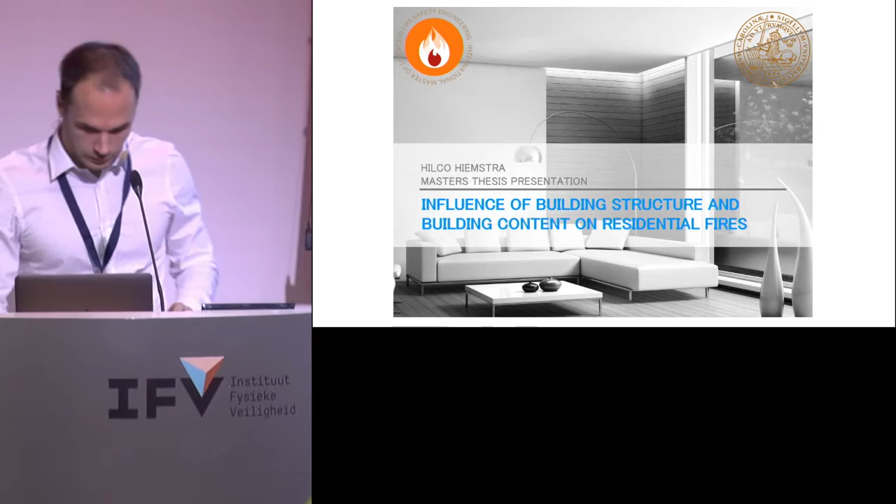Good afternoon, my name is Hilco Hiemstra. I'm from the Netherlands. I did my master at the International Master of Fire Safety Engineering, and I wrote my thesis at Lund University.

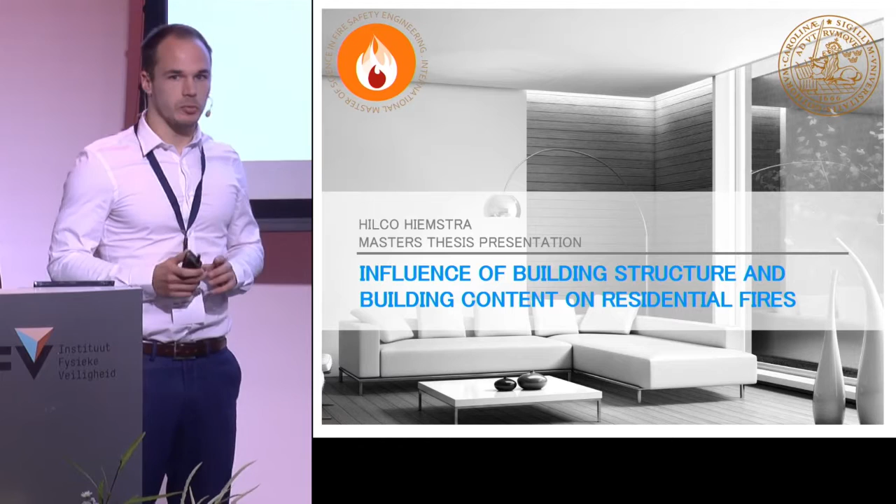There's a lot of research done on fires in residential buildings, and it's important that insulation has an influence on fire behavior and also on the building content. We already know that, but during my thesis I compared how we built in the 70s and how we build today, and also how the building content changed. It's also changed during the last decades, and I made a comparison between these developments and show what the results are. I only have 10 minutes, so I will do it very quickly, and in the end I will give a short conclusion.

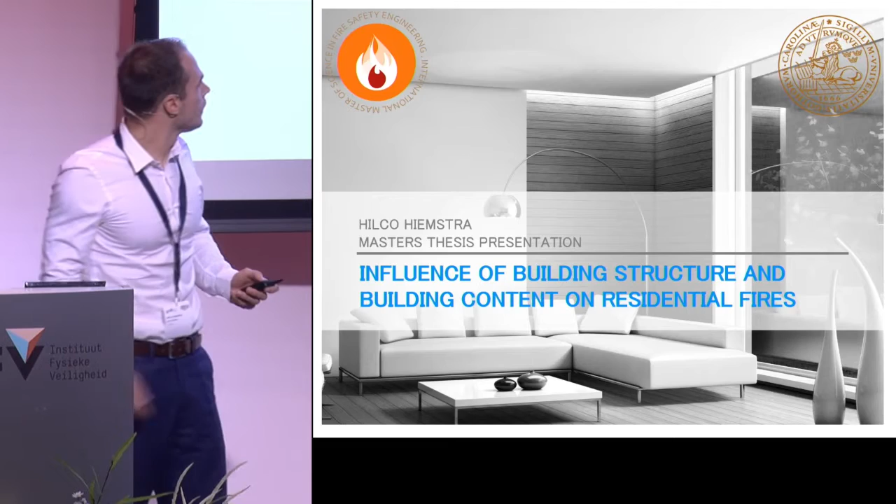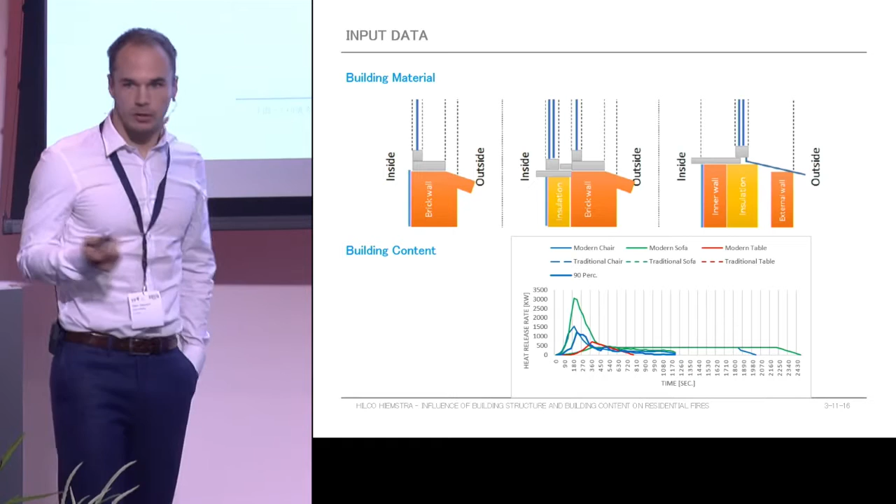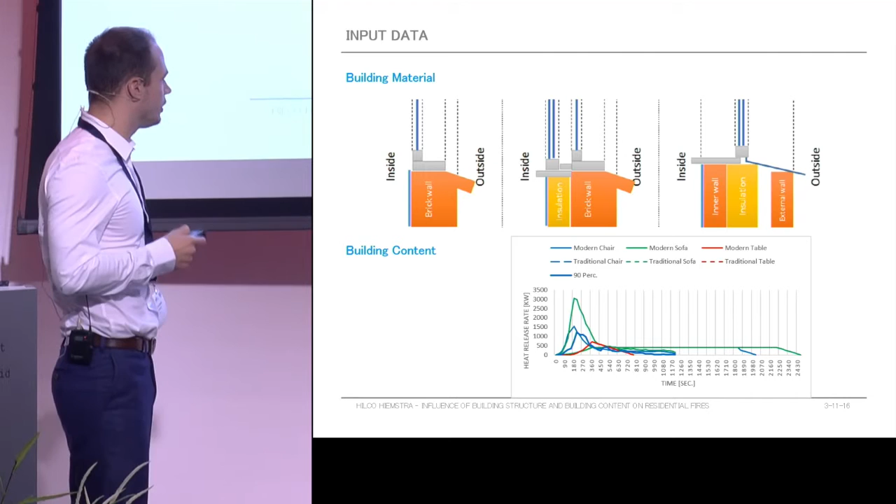In the solid lines I have the modern furniture, and in the other lines the traditional furniture. For example, this solid line is a modern sofa, and this green line here is a traditional sofa. So you can already see there is a lot of difference in this data, and nowadays we also use data from tests done in the 70s and 80s. So it's very important to see the difference between these items.

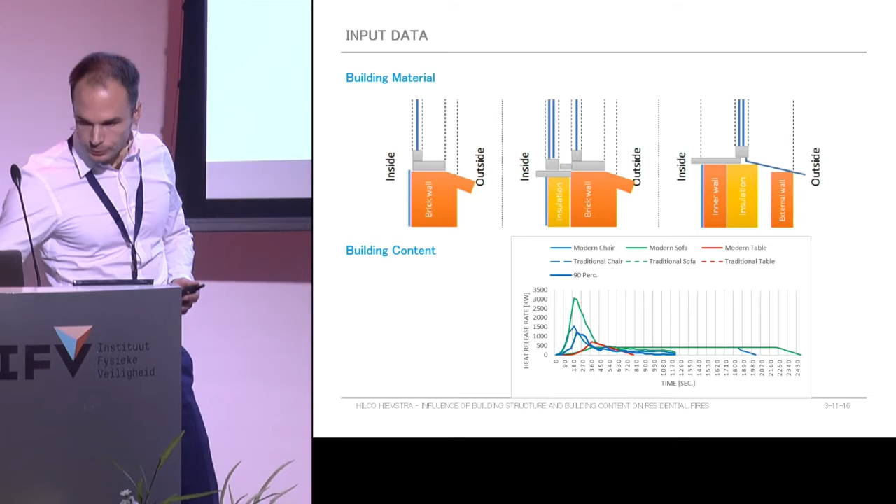I use this information in a two-zone model. I used B-risk for this research because B-risk is a two-zone model, so it's very easy and you can compare very quickly different scenarios.

B-risk can simulate item-to-item fire spread ignition. So what I did is I set up a fixed geometry and a fixed placement of furniture. This is my standard input.

First I start with a fire in a sofa. B-risk can simulate fire spread to, for example, a table or another sofa, so you can generate a more realistic fire curve.

B-risk can also simulate irradiation from a hot layer. If there is a hot layer, you have radiation from the smoke layer that can also ignite items in the room, and you can make a lot of variations of different fire scenarios. I think B-risk was a very good program to use for this research.

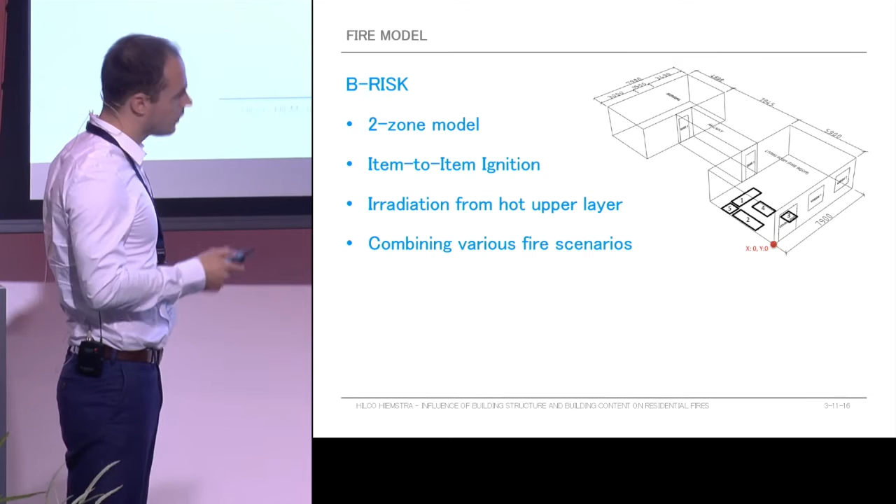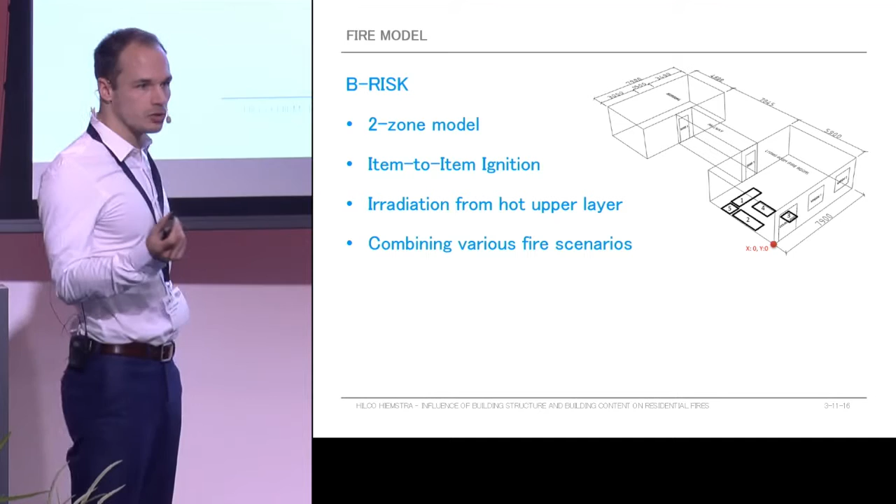So I have 12 different scenarios, 12 different runs to compare. First with traditional furniture, then with modern furniture, and then with windows opened and closed, to see the influence of closing the windows or not. So I made these comparisons.

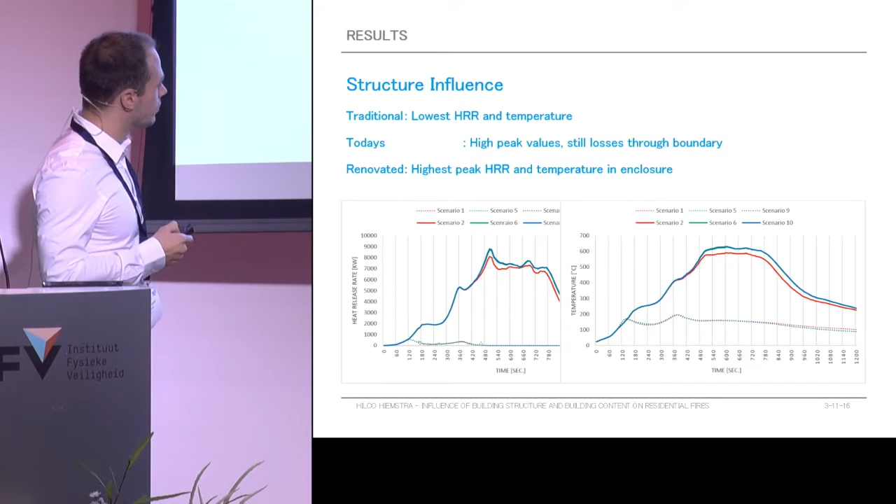These are the graphs I gained. This is the traditional case, with a dotted line showing when the windows are closed. For the traditional case, I mainly used the open-window results, because in the under-ventilated situation you get almost the same results, as the fire goes out very quickly.

From these graphs you can see that the traditional structure has lower heat release rates and lower temperatures. The red line is the traditional case. This is a comparison of the structure with only modern furniture — the traditional structure has a lower heat release rate and also lower temperatures.

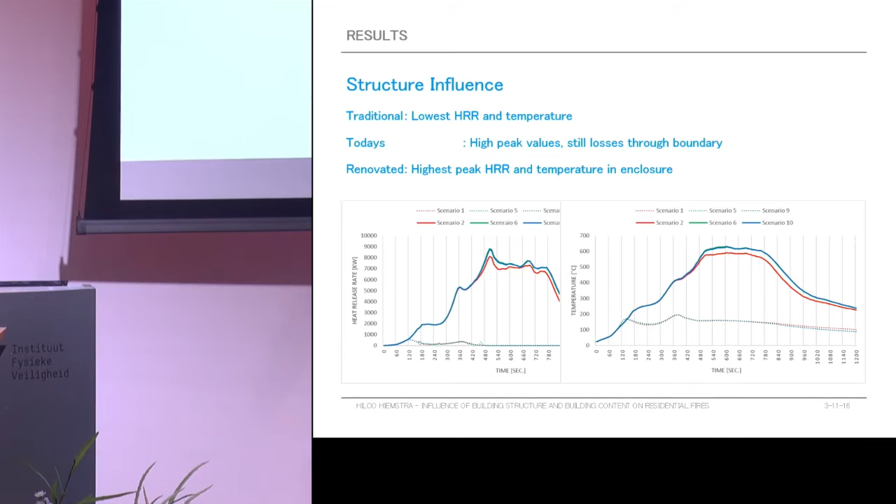Lower temperatures in the enclosure. The renovated case is the green line, which gives the highest peak values. This is because the insulation is placed on the inside, so heat does not loss quickly — it stays in the room, which is why the temperatures are higher.

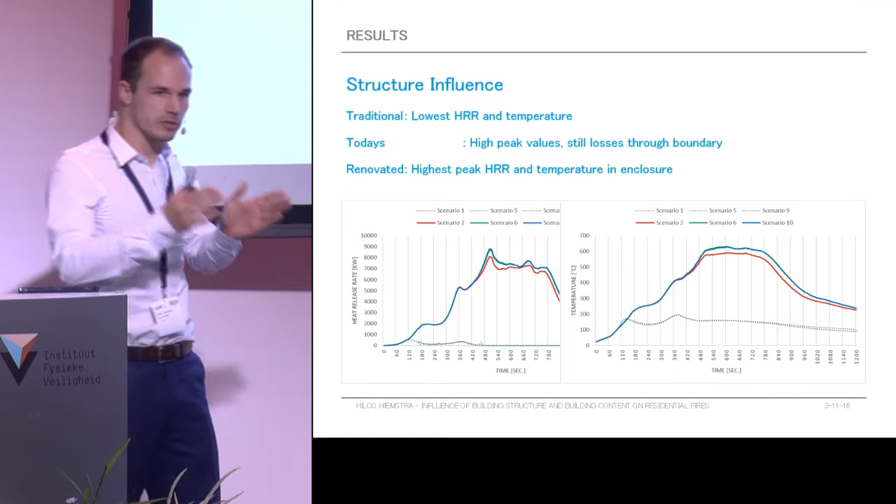Today's structure is in between, because the insulation layer is placed on the outside. There is first a concrete layer, and the concrete can absorb a bit of heat, which is why the temperature is a bit lower than in the renovated case.

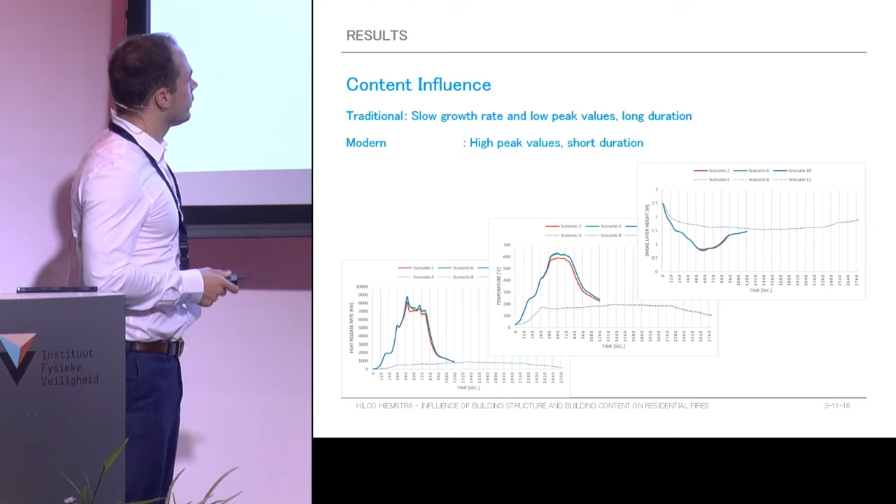Then the influence of the building content, the furniture. This graph shows heat release rate, temperature, and smoke layer. The solid line is the modern furniture — you can see the modern furniture has a really intense fire, very short duration but very high peak values, and the same goes for the temperature.

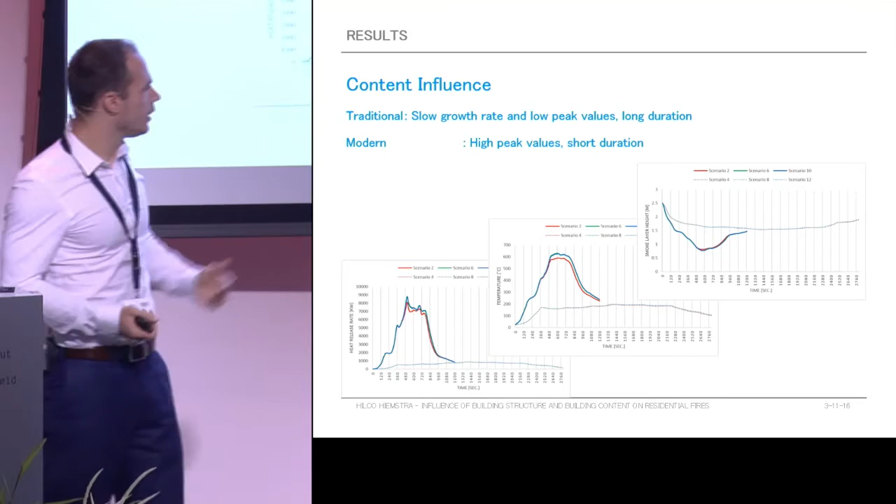The traditional furniture gives a small fire, but the duration is much longer, and this also counts for the temperature. For the smoke layer, it stays equal because heat can go out steadily through the windows, but with an intense fire there's too much mass loss rate that can escape the window, so you get a thicker smoke layer.

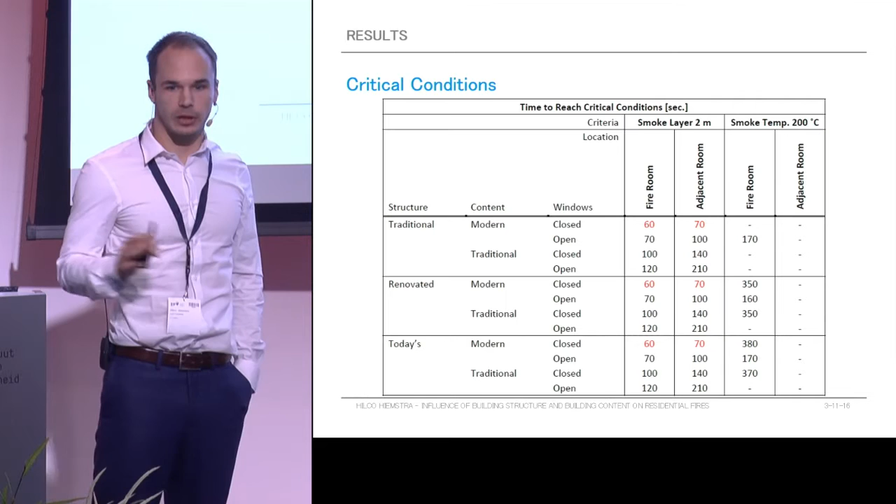The building content is very important for life safety. In all cases, modern furniture gives critical conditions very quickly. The traditional structure becomes more important when the fire is fairly developed, but by that time people already are, or have to be, out of the building.

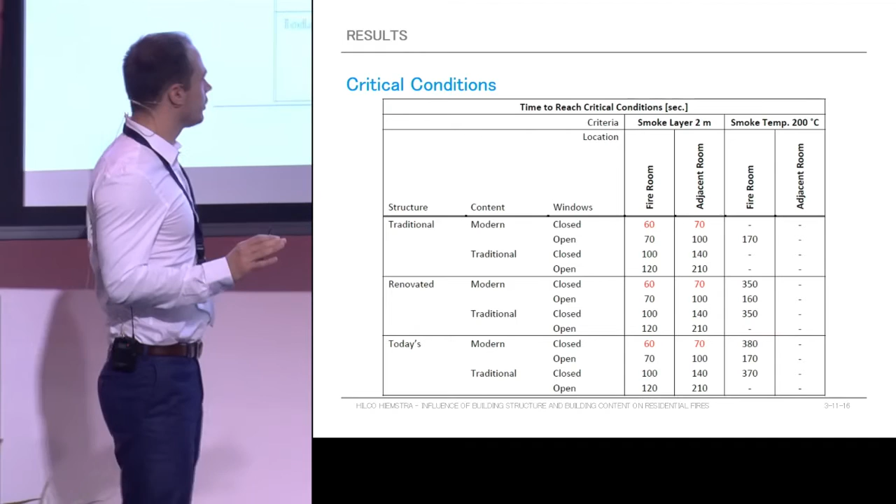Also, when the windows are closed and the fire is under-ventilated, critical conditions are reached even earlier, because smoke cannot go out — you reach critical conditions already within 60 seconds. You can also see that it's not the temperature that is the main part of the critical condition, but the smoke layer going down very quickly, so you have to walk through toxic gas, and that's dangerous.

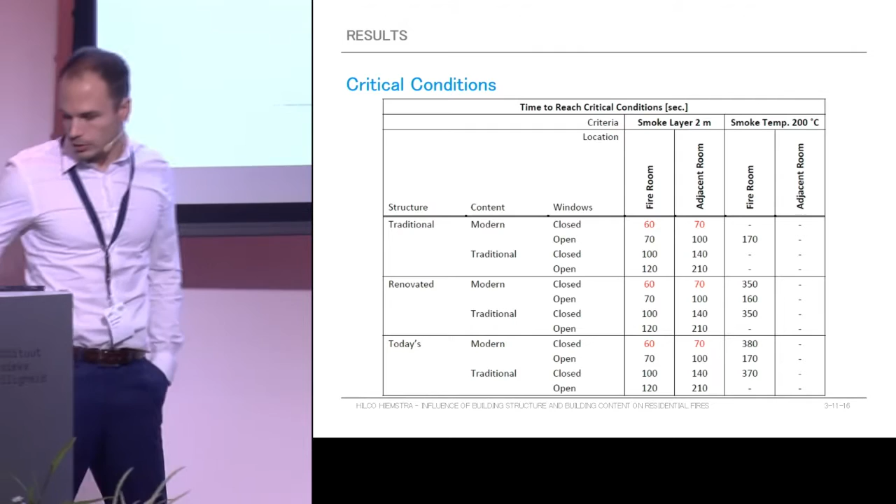In conclusion: with more insulation, higher peak values of heat release rate and temperatures are reached. Insulation placement matters — on the inside, temperatures will be higher than on the outside. When windows are closed, critical conditions are reached earlier, and structure type does not affect the time of critical conditions much, because people are already out of the building.

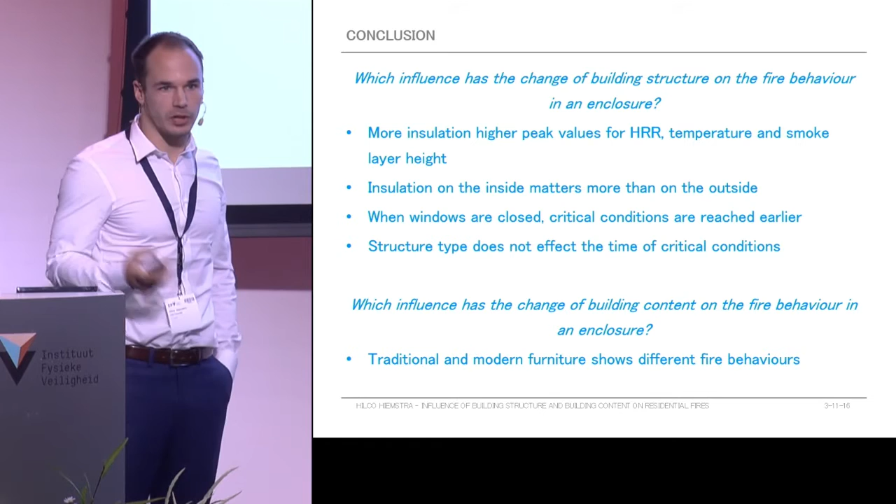Which influence does the change of building content have on fire behavior in the enclosure? Traditional and modern furniture show different results — modern furniture has very intense fires of very short duration.

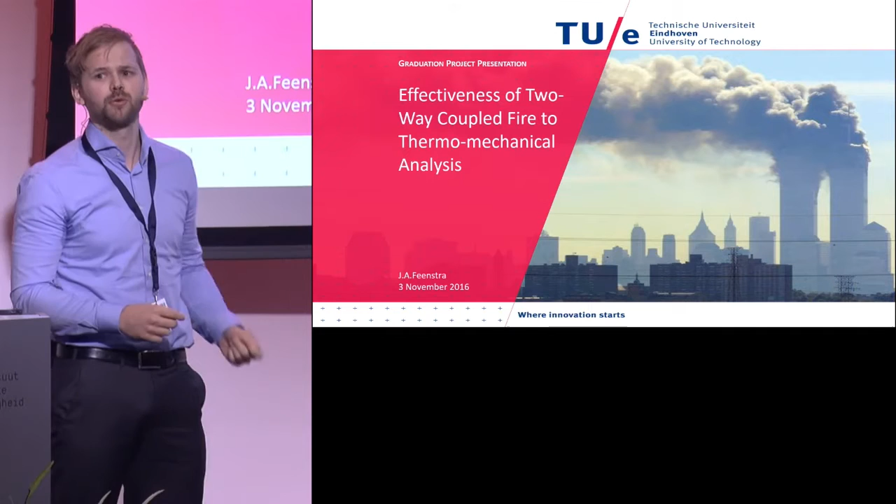Welcome all, my name is Jelmer Feenstra. I recently graduated from Eindhoven University of Technology as a structural engineer, and it's an honor to present my thesis project here. I studied the feasibility and effectiveness of two-way coupled fire to thermomechanical analysis. This picture shows the attacks of the World Trade Center, a moment soon after the crash of the second plane. I do not show you this to shock you, but this event triggered a renewed interest in structural response to fire.

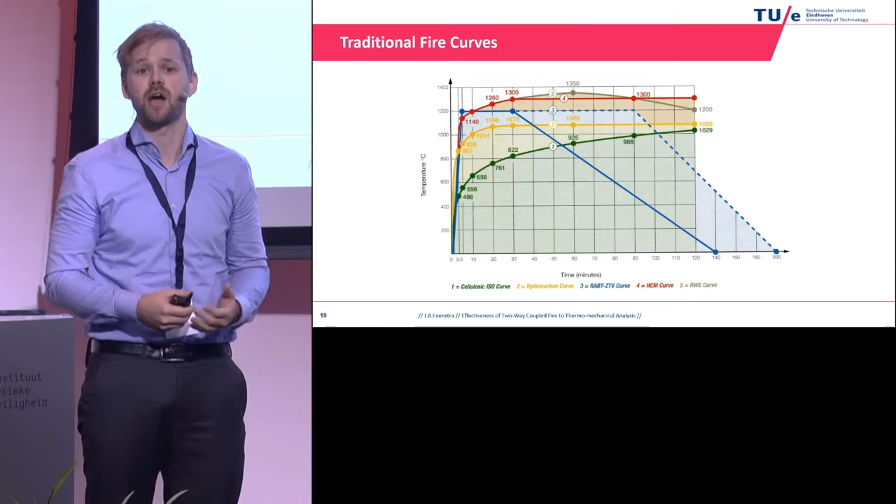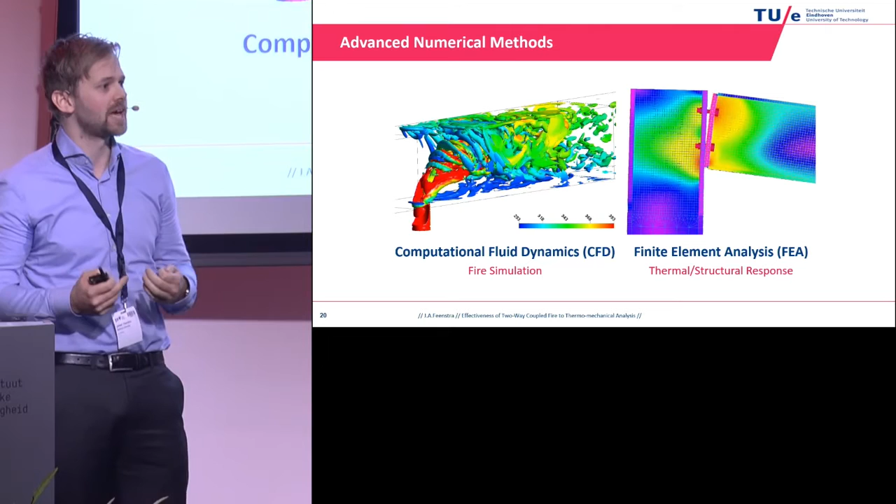The typical way we deal with structural fire calculations is by imposing so-called time-temperature curves onto our structure and then analyzing its behavior. The main drawback is that it can't accurately resemble the randomness associated with fire, and to a degree not the 3D dependency of the fire on the compartment and the structural system itself. So in the aftermath of the attacks on the Twin Towers, there was a request to make use of more advanced numerical methods for these types of calculations, specifically computational fluid dynamics for fire simulations, combined with finite element analysis for heat transfer and structural response.

There are various examples in literature where people combined these systems, referred to as coupled CFD-FEM or coupled fire to thermomechanical analysis. Basically, you start with the fire simulation, from there you obtain your thermal data. You then transfer to the finite element domain, where you analyze how that simulated fire influences the temperature of your structural system, here represented by a steel plate. These temperatures induce thermal expansion, displacement, and mechanical response, which you analyze in the next step, the structural response analysis.

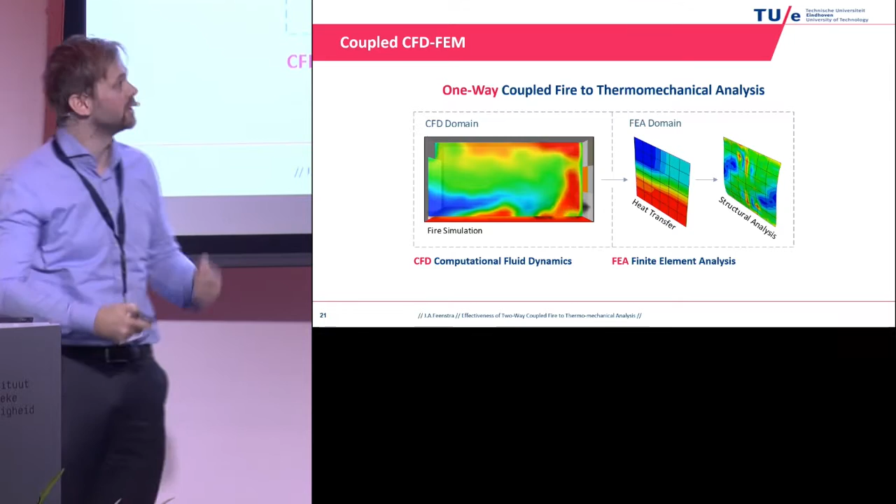You can find various examples of this in literature, but what I'm interested in is that when the fire starts blazing and the system starts changing and possibly even fails, your compartment where you started actually changes. So the structural response could in turn influence your fire. I'm not only interested in the effect of the fire on the structural response, but also of the structural response back on the fire. So I set out to study this subject, and the first question I asked myself: can we actually do this? Can we combine these systems both ways?

If I get an idea of this, I want to study how to do this, and how to do it efficiently without it taking too much time. And in the end, because it's a circular process now instead of a linear process, I would like to comment on its effectiveness. Should we even do these kinds of simulations?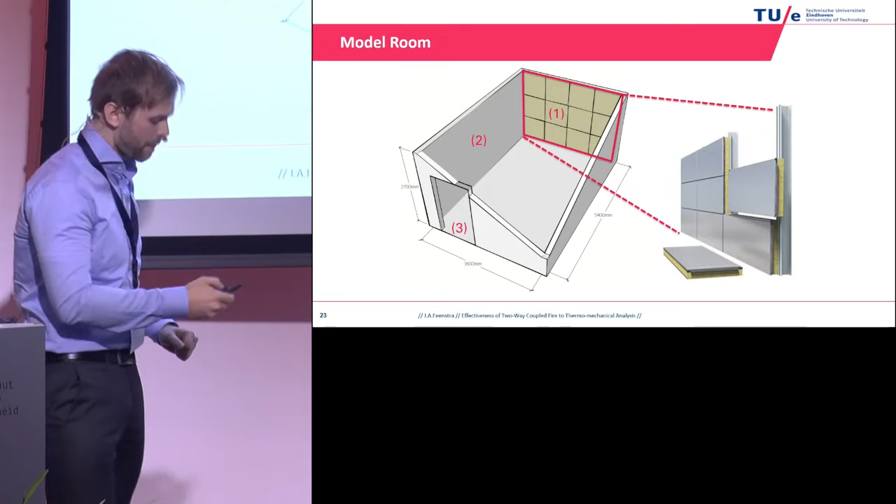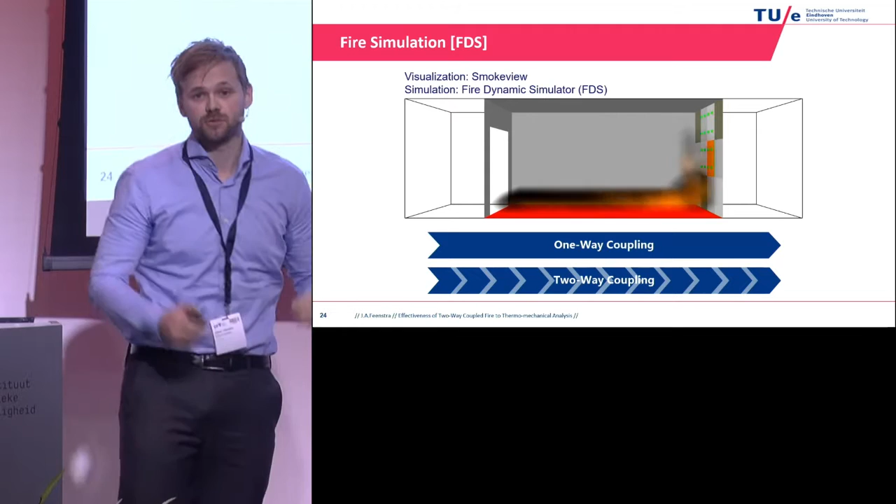Possibly far better to just illustrate a quick simulation of a fire. Here you see an FDS simulation of a room fire. Actually, it's about an hour of simulation, starting from flashover, fully developed, and a decay phase.

My main point here is I want to stress the difference between this one- and two-way coupling. When I do a one-way coupling, I can start with just the fire simulation for the full duration, and then do the heat transfer analysis and the structural response analysis. But when I want to do it in a two-way coupling, I have to know during my fire simulation if something in that system changed, so I can only do it for a couple of seconds - ideally per single calculation step.

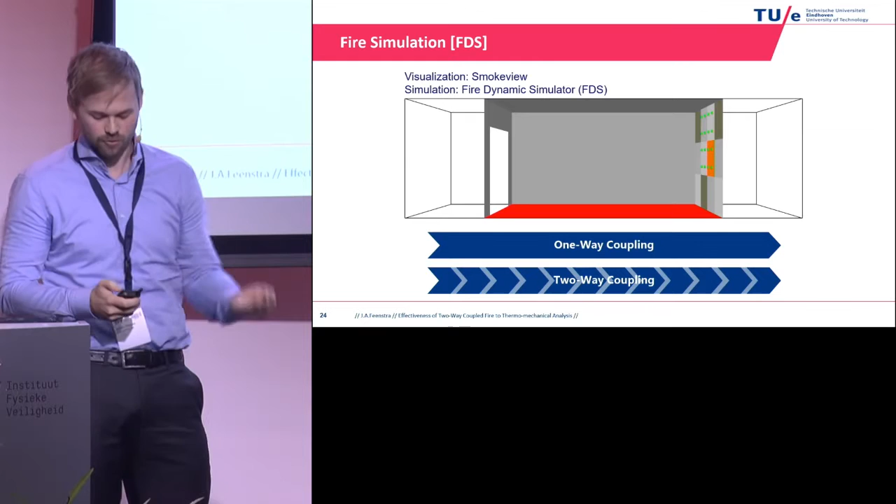So I have to do this, as represented by these banner-like arrows, in very small steps: a couple of seconds of fire simulation, heat transfer analysis, structural response, couple the response back, and so on and so forth. Now, when we redraw my scheme with the pictures I showed before, here represented by the types of analysis with the blue squares, we obtain something like this. These are the various steps I identified as what you have to do to come up with this coupling. So how can we actually do this?

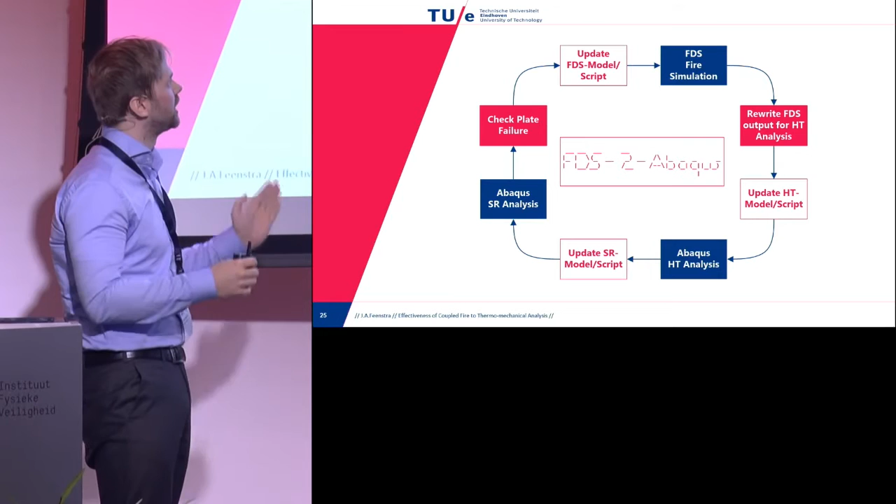Now, you can imagine that when you want to do this one-way coupling, you can do this by hand. It takes a little time, but it's doable. But when you have to do this circle over and over again, it will quickly become a very tedious and time-consuming task.

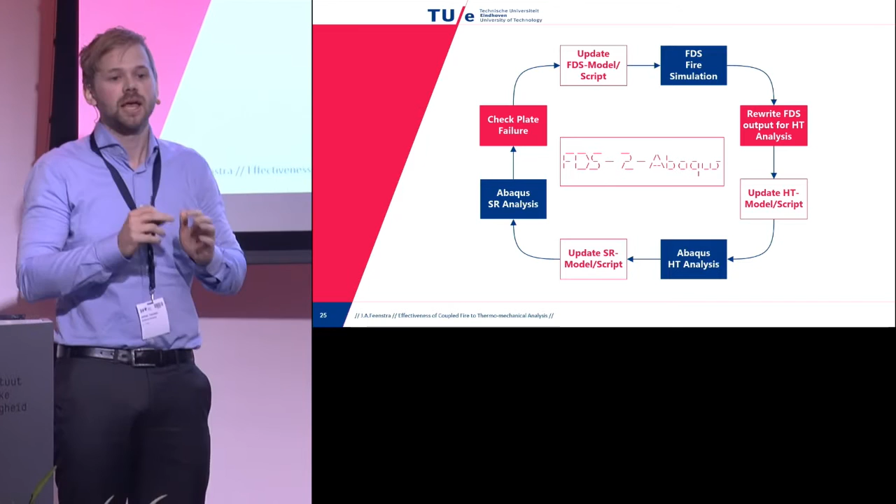So therefore I learned how to code and wrote a program which could do these separate steps for me. This program I refer to as FDS to Abaqus. Sadly, due to time considerations, I can't go into detail on the separate steps, but what you should take from this is that this program, FDS to Abaqus, is able to manage both the one- and two-way coupling of such a system, in this case my system.

Now, I do want to stress one important thing: I don't think this accurately resembles a real-life fire simulation, due to a lot of assumptions that had to be made throughout the process. But it does illustrate that taking this effect into account could significantly influence both the fire behavior and the further failure progression of your structural system.

So with that, I would like to summarize my presentation. I set out to couple a fire simulation to a structural response analysis, but also couple my structural response analysis back to my fire simulation. By doing this, I found that when we take the one-way coupled approach versus the two-way coupled approach, there is a significant difference in failure of my structural system.

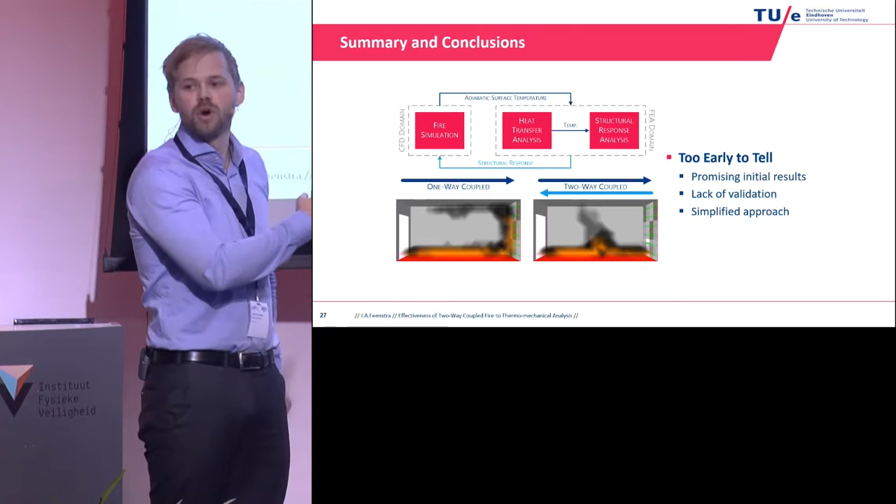Now, when I go back to the question I asked - should we even do these kinds of simulations - I sadly have to say it's too early to tell, mainly because most of this research has been based on the computer, so there's no validation whatsoever. That would be one of the next steps. Also, I took a simplified approach to both my structural system and my fire.

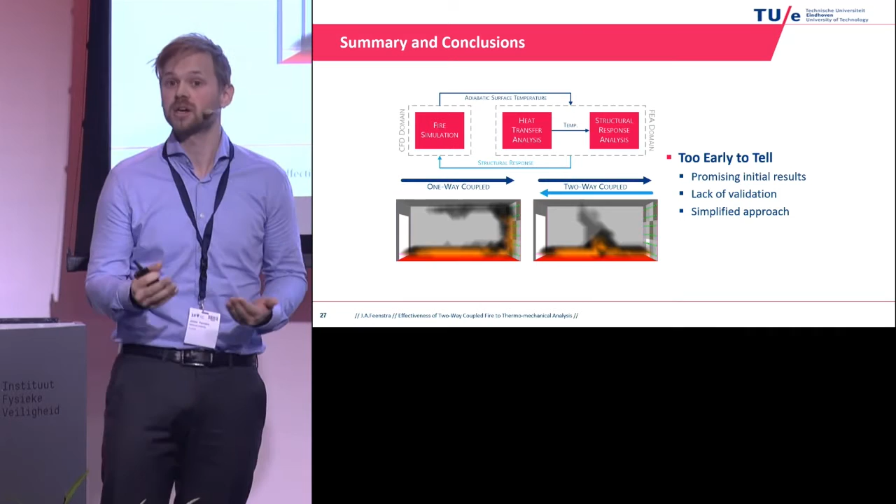But still, there are some promising initial results that show that with further development of this tool, it can become a very powerful tool in structural fire analysis, and maybe even in fire safety engineering. And with that, I would like to thank you for your attention, and you can find me if you have any questions later on. Thank you.

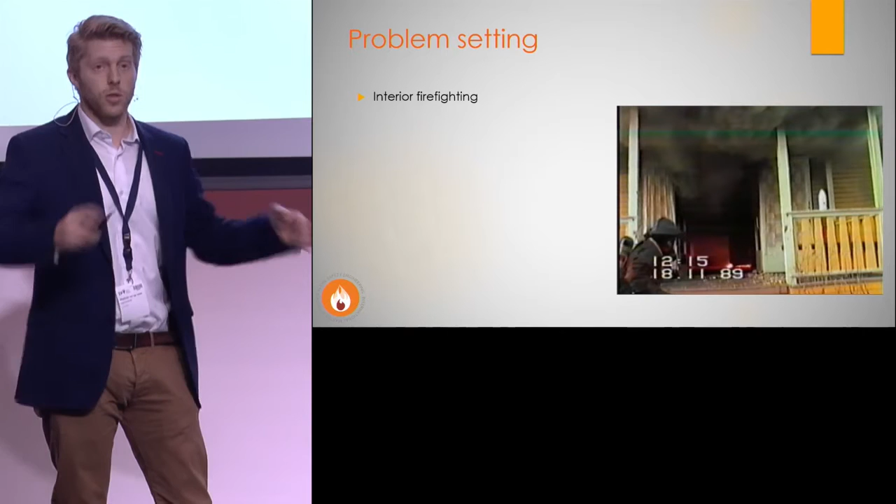For all the people who aren't firefighters, let's start with the problem setting. Very often we have to perform interior firefighting. A fire in an enclosure is going to produce smoke, and this smoke builds up in a gas layer. This gas layer is hot, creates very low visibility, and also contains unburned flammable gases. This means we constantly have to work in near-flashover conditions, which can be a very stressful environment.

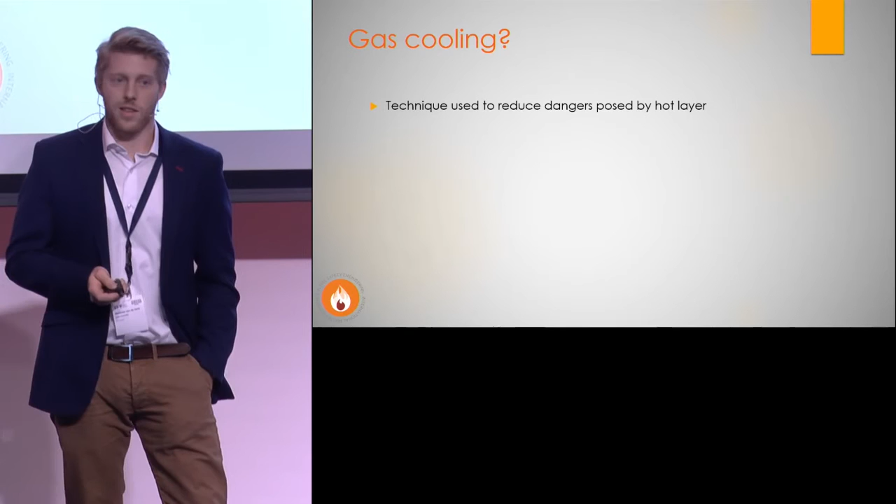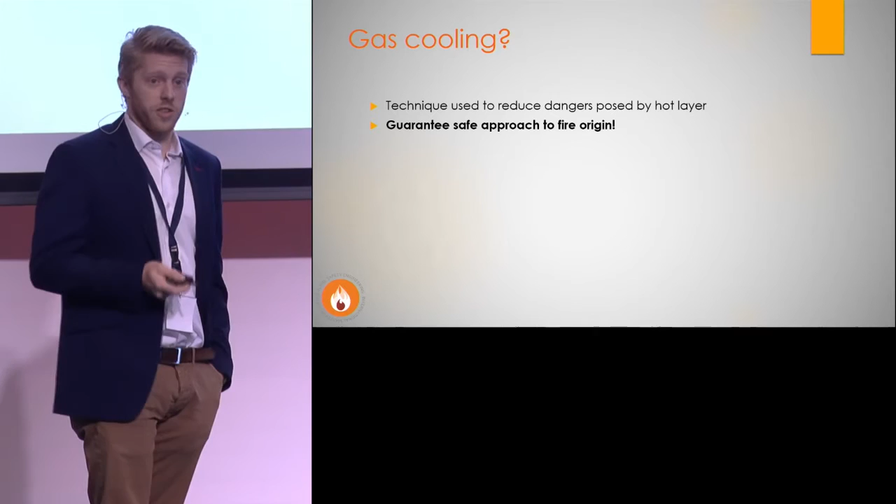Now, gas cooling - what is gas cooling exactly? It's a technique used to reduce the risks posed by the hot gas layer. It's important to notice that it isn't a technique to handle the fire itself, but is used to approach the fire safely. How do we do that? By focusing our attack on the hot gas layer. If we perform this well, we could theoretically cool the gas layer, contract it, and maybe inert it. However, if we perform it badly, we can create a lot of excessive steam.

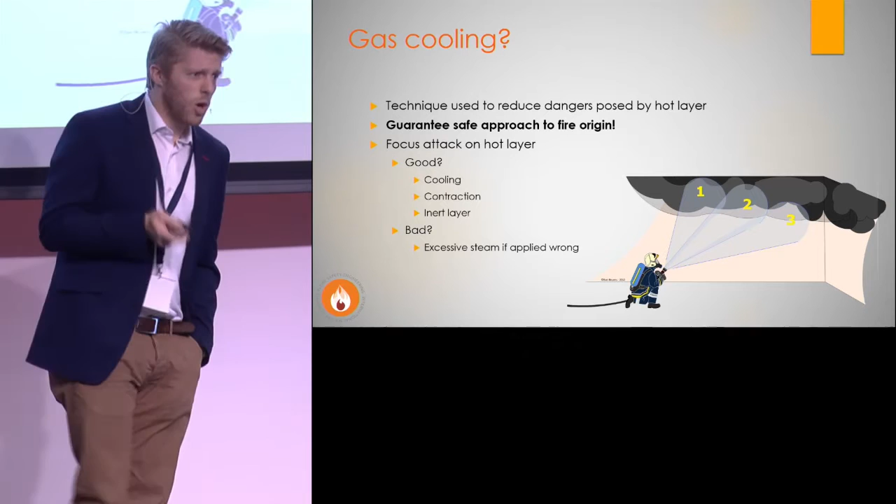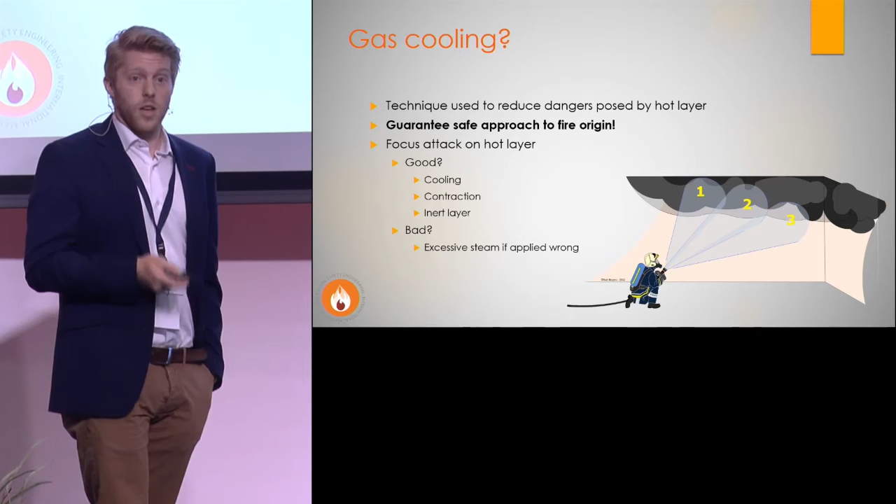Now, what is the reason why I've done this particular topic? Even though this technique is already implemented in several fire stations, there's still limited scientific validation on it. So the technique that is known right now is the pulsing technique.

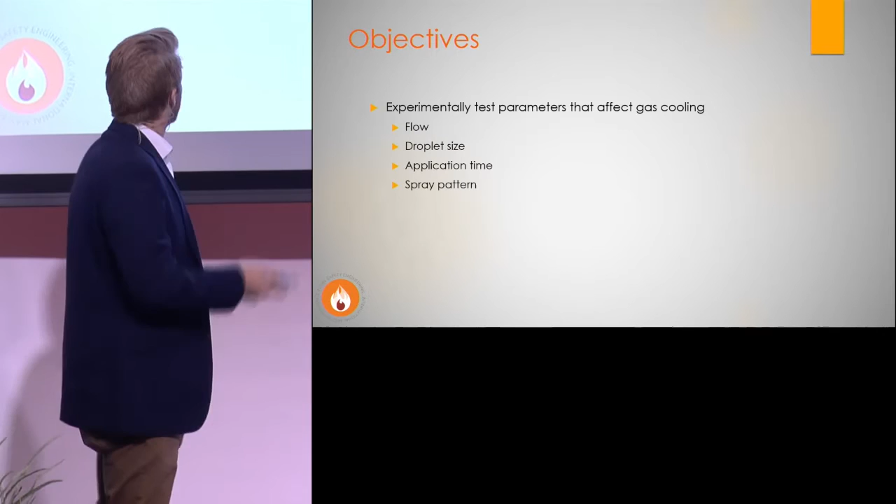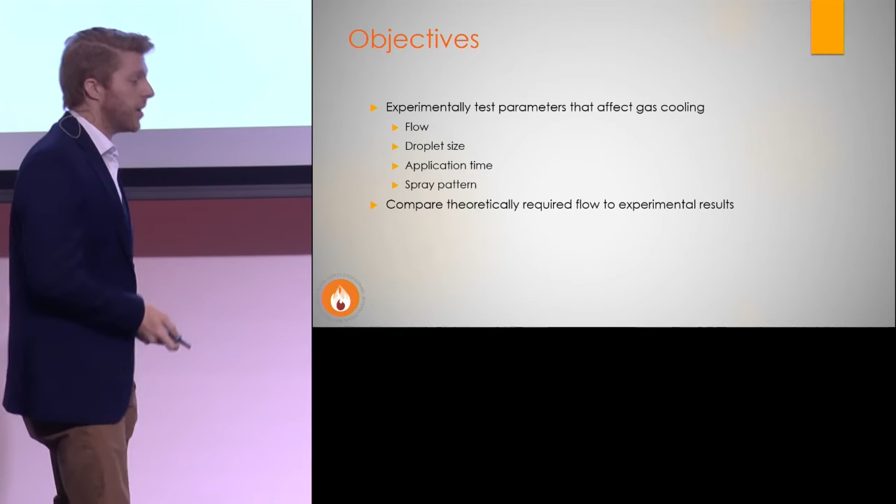So what were my objectives? First, I wanted to experimentally test the different parameters that affect gas cooling. I also tried to isolate the phenomenon of gas cooling and look at those different parameters alone. Secondly, I also looked at the theoretical validation compared to the experimental data. Lastly, I studied the secondary effects, namely the gas layer contraction, but also the buffer time before it reheats again after we apply the water.

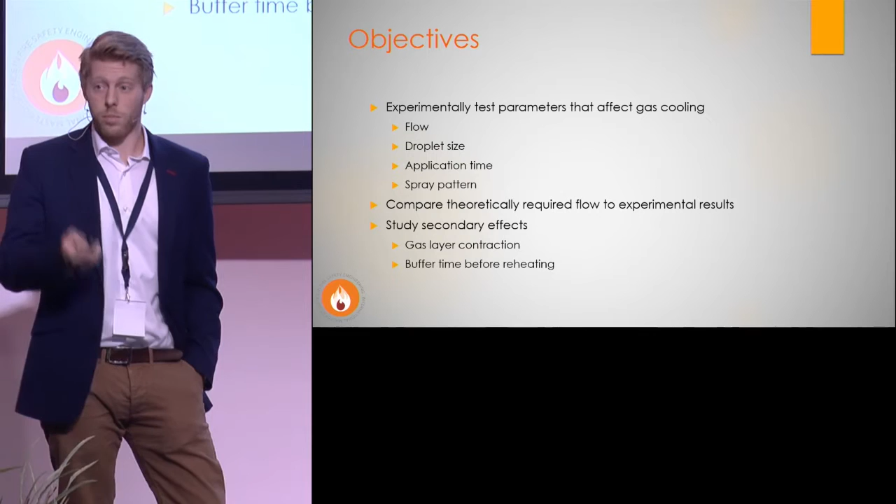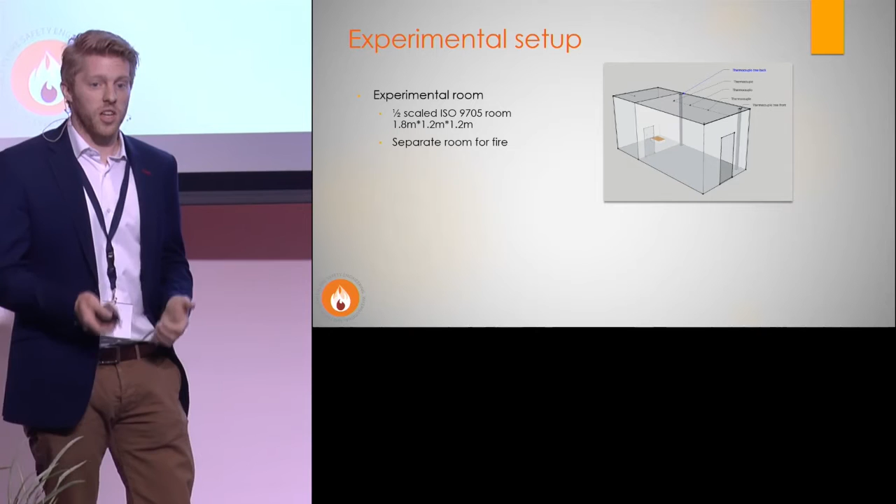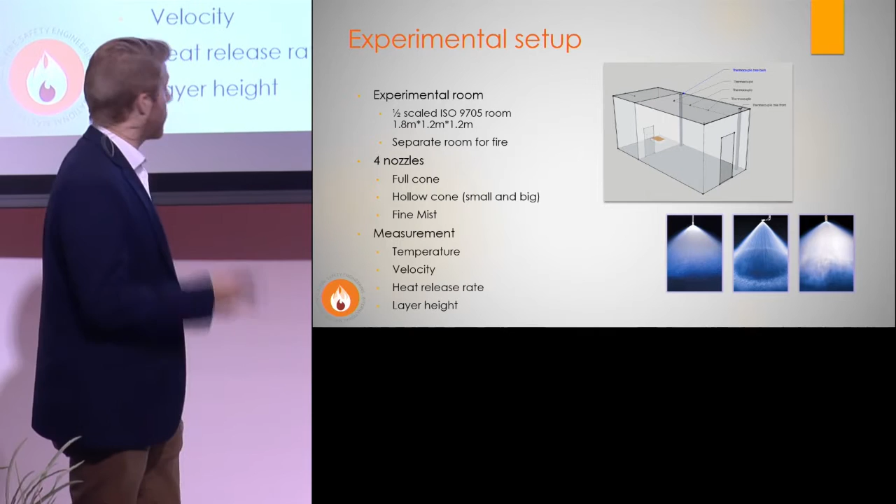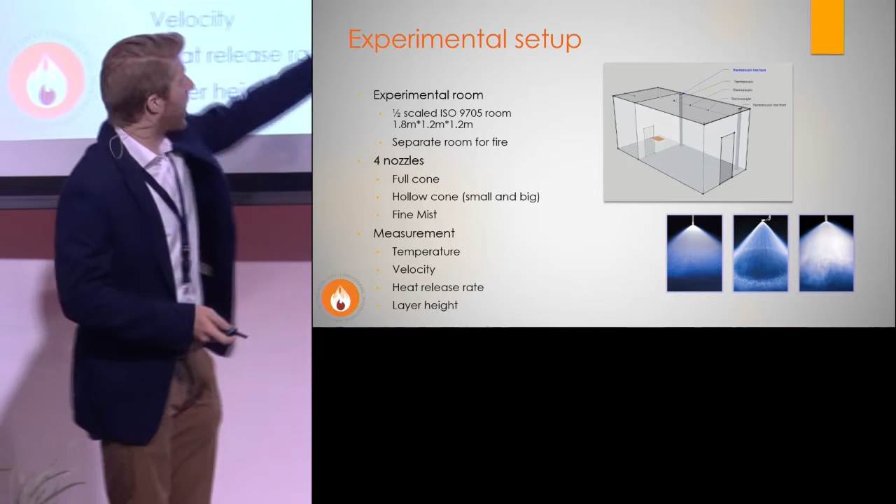The procedure: the aim was to create a gas layer of 160 degrees Celsius. We used a pre-burn of 90 seconds so we always had the same temperature, and then we applied the water. The aim was to decrease the gas layer temperature to 100 degrees Celsius. After that, we continued with a post-burn of 5 seconds to see what happens after we have applied the water.

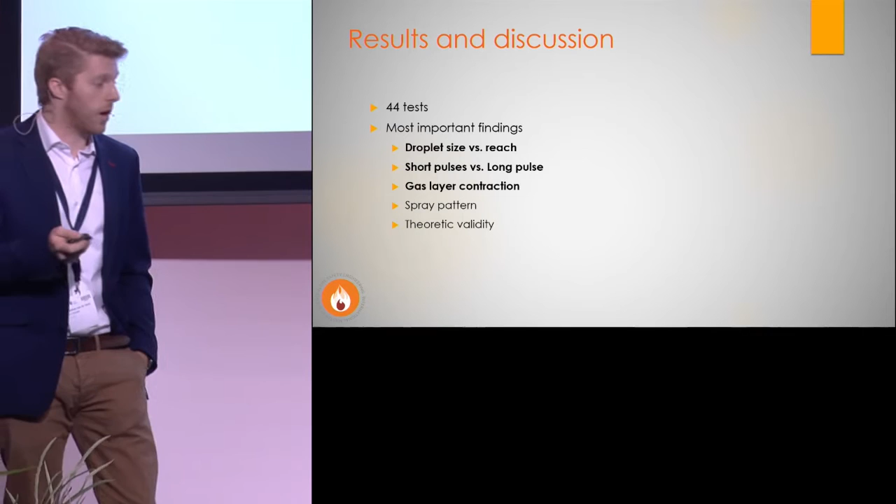In total, there were 44 tests performed. The most important findings were droplet size versus reach, short pulses versus long pulses, gas layer contraction, different spray patterns, and the theoretical validity. Since I only have a limited amount of time, I will only discuss the first three.

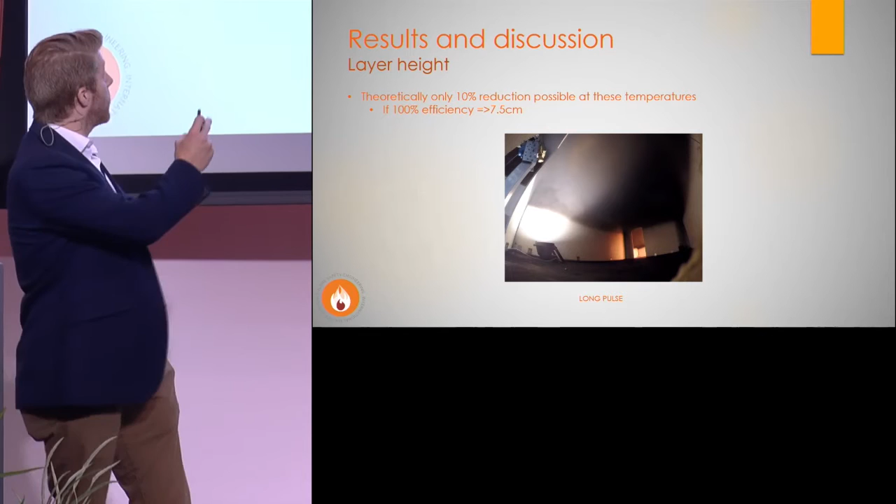I will start with the layer height. Why do I start with this? First, to show you exactly on video how the experiments were conducted. For the layer contraction, we did some theoretical calculations and saw that at these temperatures there was only a reduction possible of about 10%. So we had a gas layer of 80 centimeters, meaning you could only change it by about 8 centimeters if you have 100% efficiency.

So you can see the nozzle here.

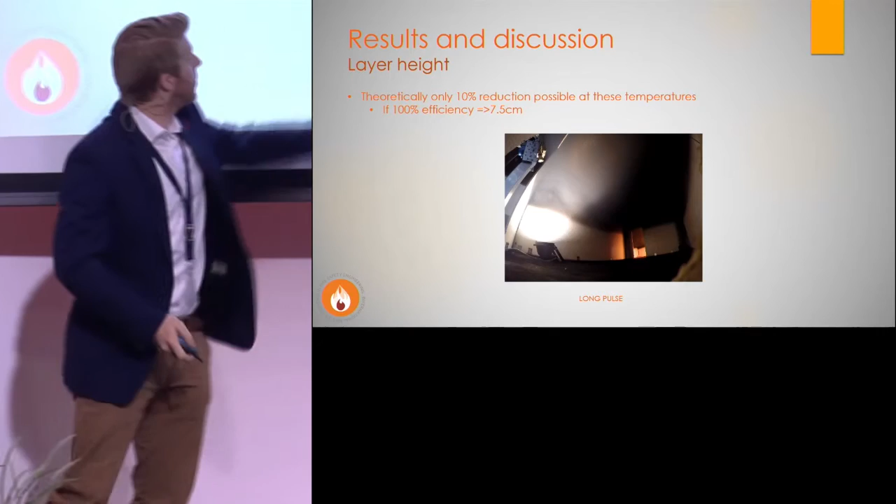As you can see, or might not see, there wasn't a very big difference in the gas layer contraction.

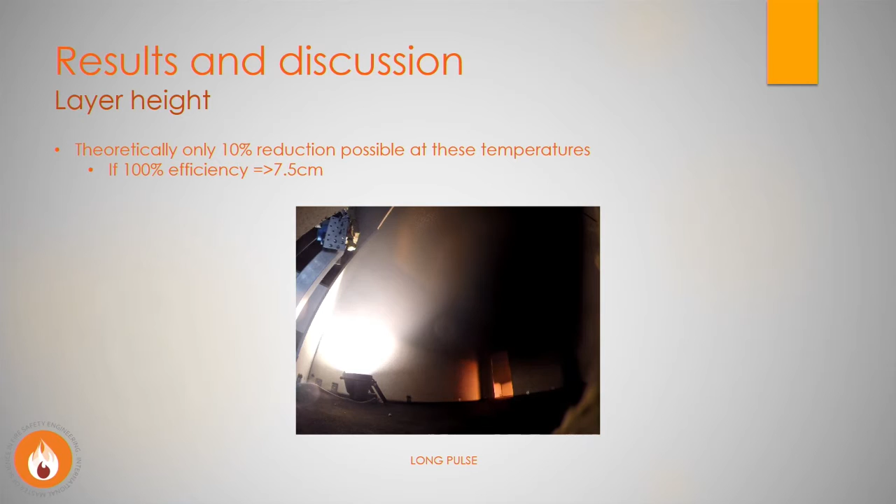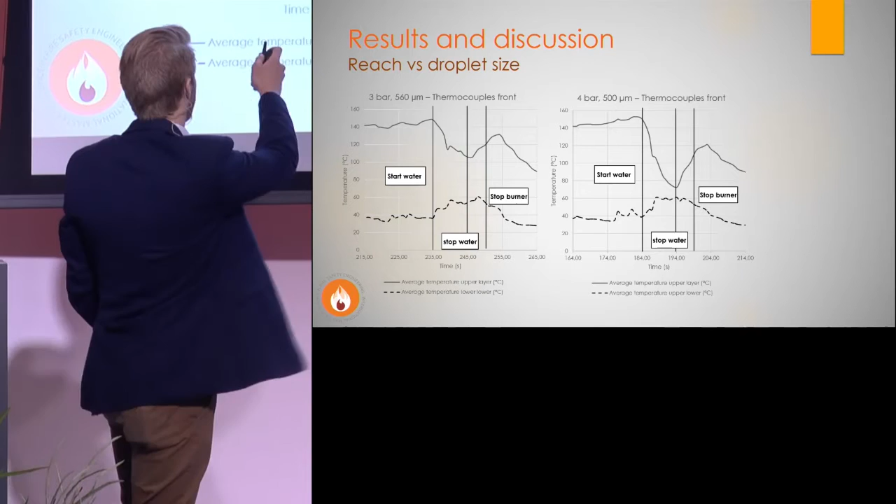Now, more interestingly, there were some very nice remarks on the reach versus the droplet size. Before I explain what I'm trying to say with this, there are two charts here which show the temperature versus time. Both of these charts are tests that were used with the same nozzle. But what is the difference?

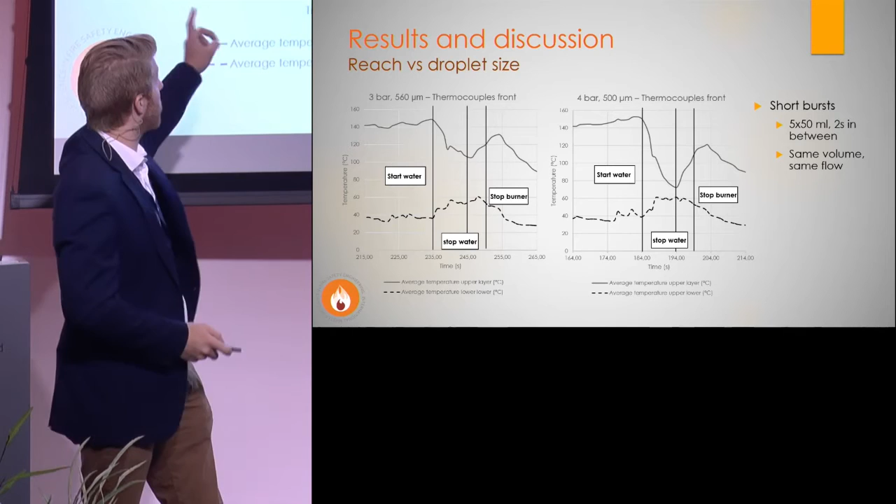We used, on both tests, 5 fast shots of 50 milliliters with 2 seconds in between. This was done to use the same volume and the same flow. Now the big difference here is the pressure. As you can see, we have a pressure of 3 bar and a pressure of 4 bar.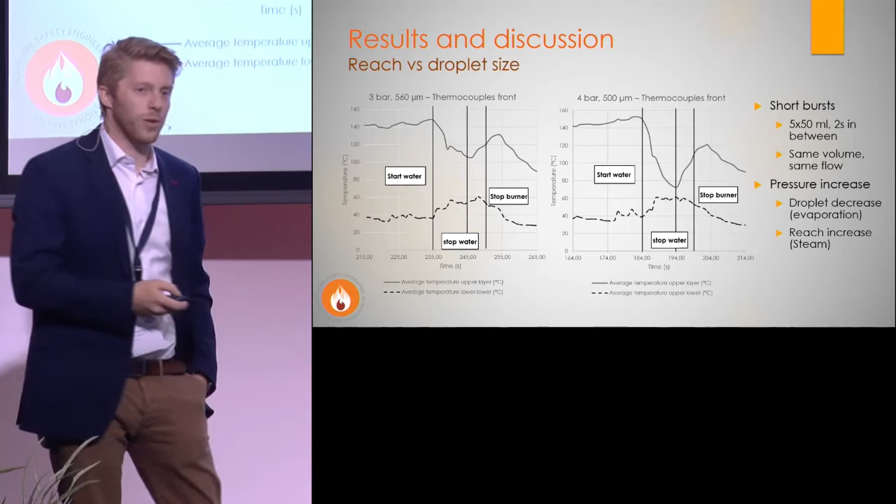As we know, when the pressure increases, the droplet size will decrease, so the evaporation will be faster. Also, if we increase the pressure, the velocity will increase, so the reach of the stream will increase. So more water will hit the ceiling or the walls, and this can result in a lot of excessive steam.

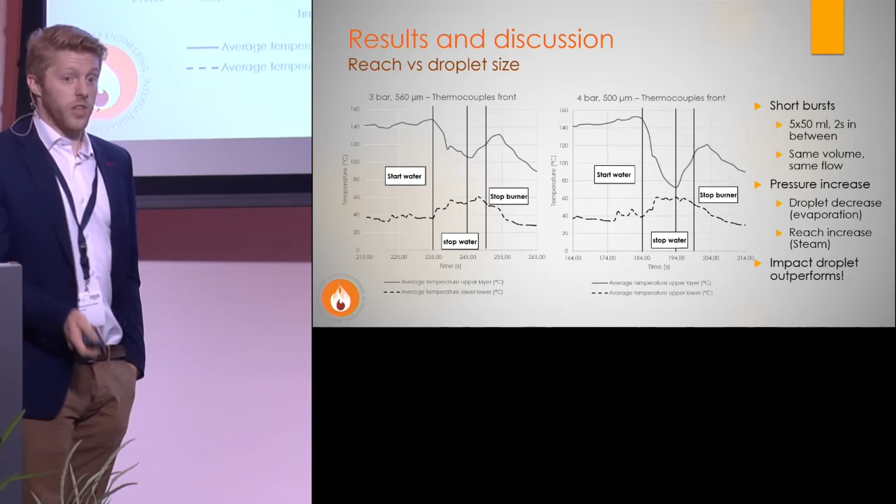Now you can clearly see that at 4 bars, the highest pressure, this first effect, the droplet decrease, outperforms the inverse effect of the increased steam. So there was a way better cooling at 4 bar.

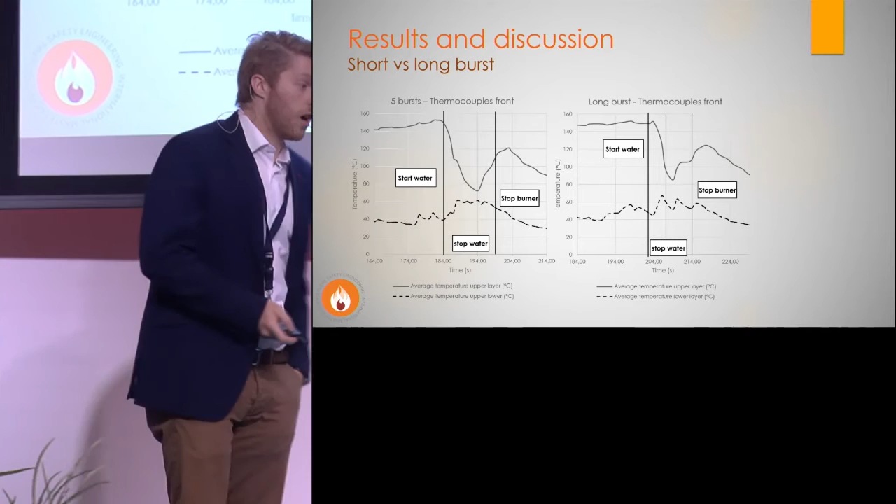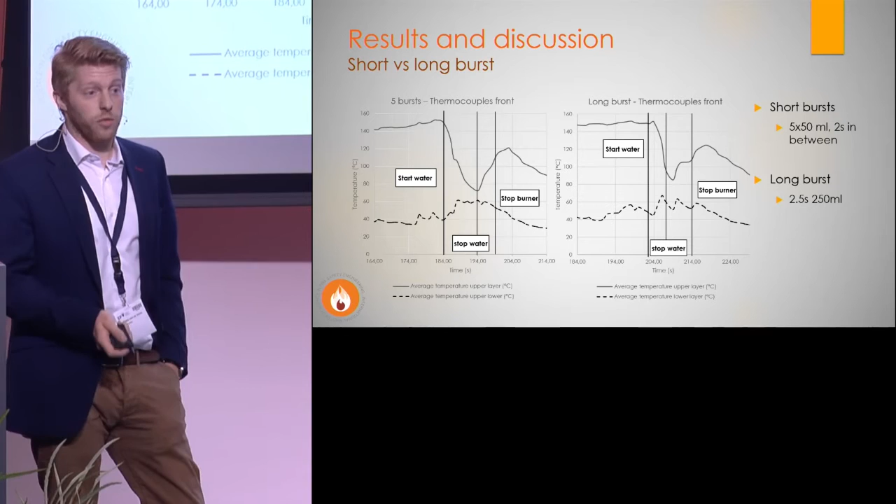Another interesting thing that we saw was that when we compared the different short bursts that are taught to firefighters right now, we compared that with one long continuous stream. The first one is the same experiment as I showed you earlier. The second one is a continuous stream with the same amount of water, but it only lasted for about 2.5 seconds.

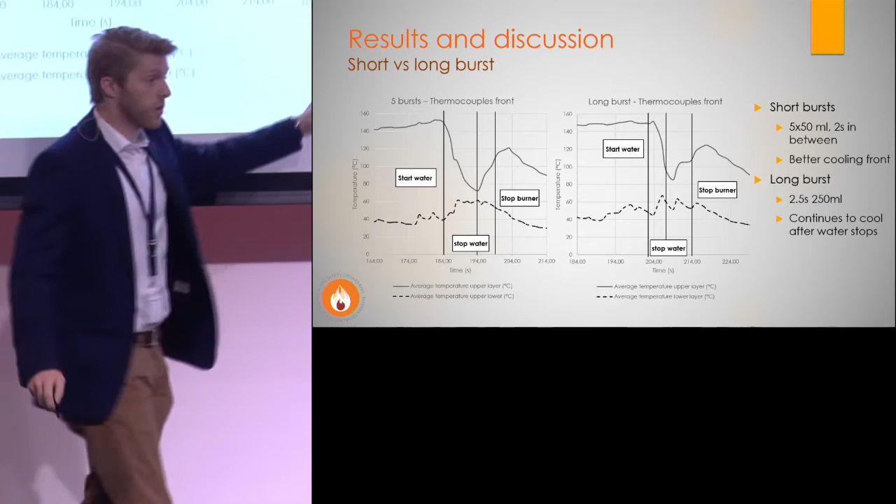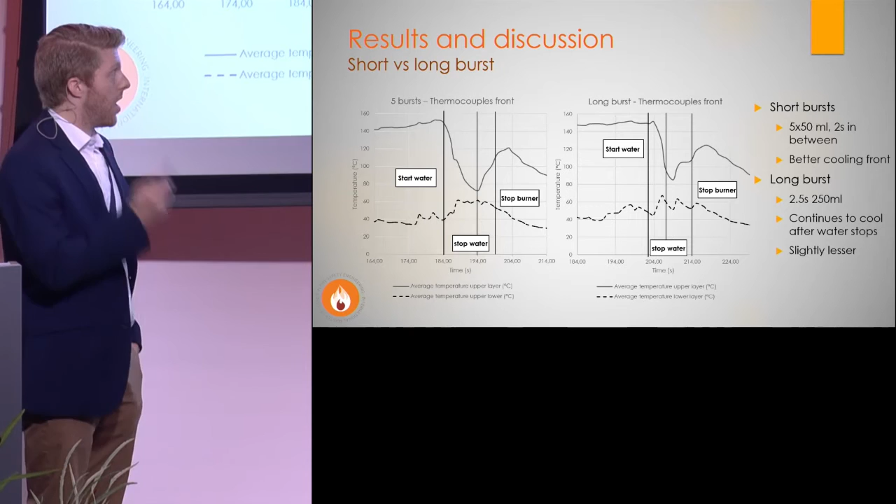Now we can see those temperature measurements were in the front. We can see that actually the 5 short bursts have a slightly better cooling effect. But if we look at the longer burst, we see that it takes a longer time before it starts reheating again. Also very interesting, it is only slightly less. And then lastly, we see that everything happens in about 1/5 of the time.

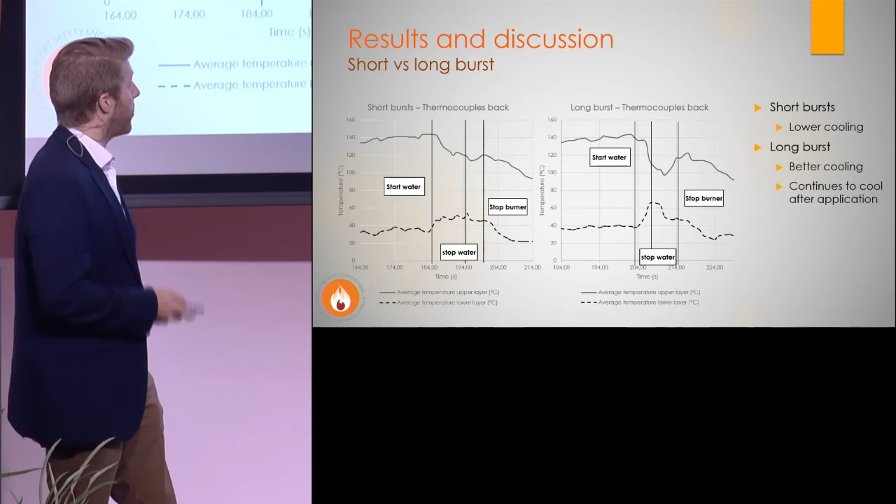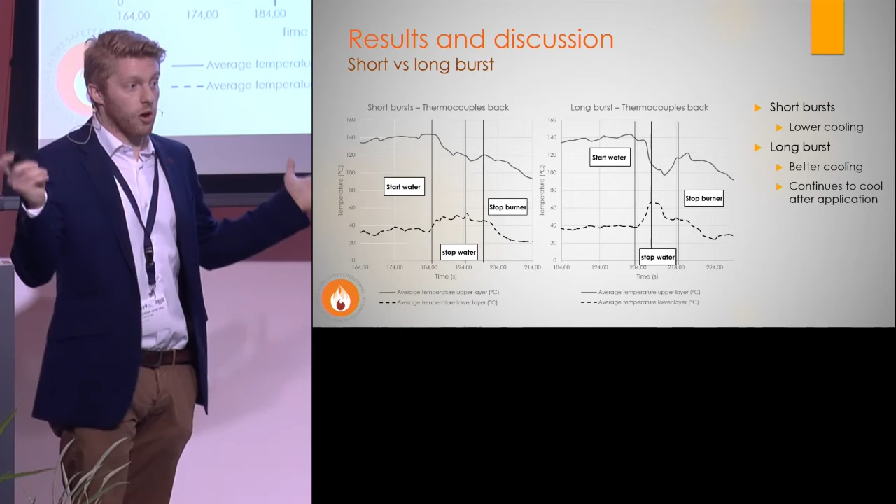When we look at the back temperatures, this is where we see the big differences. In the short bursts, they produce a very lower cooling compared to the longer bursts. There's a difference of about 20 degrees Celsius. So this is small on the small scale, but if you would enlarge the scale, these differences would be even bigger.

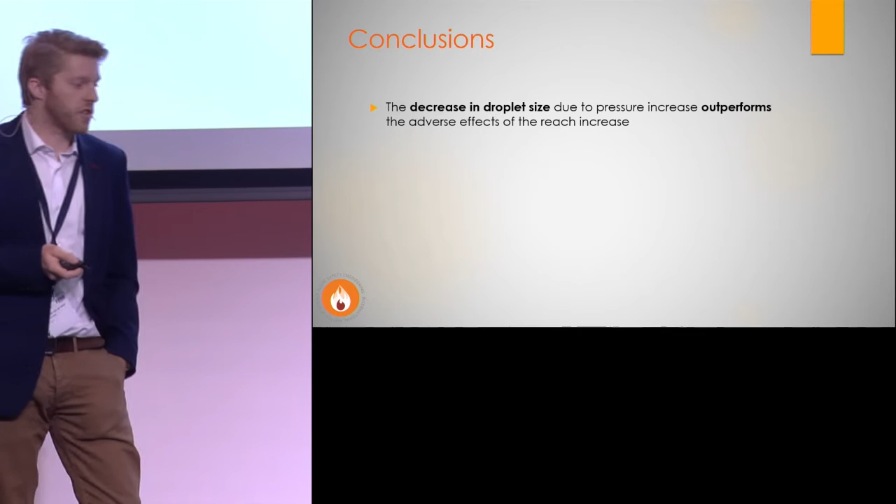So the conclusions. First of all, the decrease in droplet size due to the pressure increase outperformed the adverse effects of the reach increase. The long pulses also proved to be more effective in cooling than the small pulses. This was because less smoke would be re-entering and there would be a better cooling over the whole room. There were no layer height changes seen at these experiments, at these temperatures, but the initial increase recovered very fast, so there were no negative effects seen.

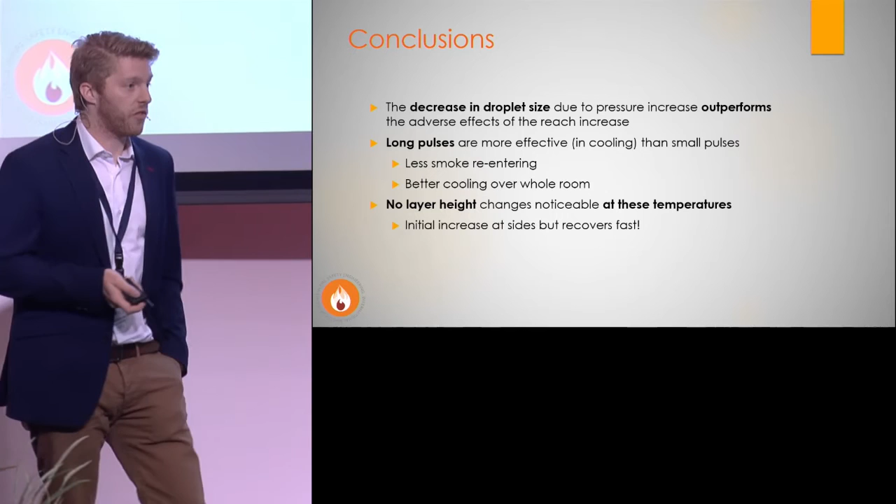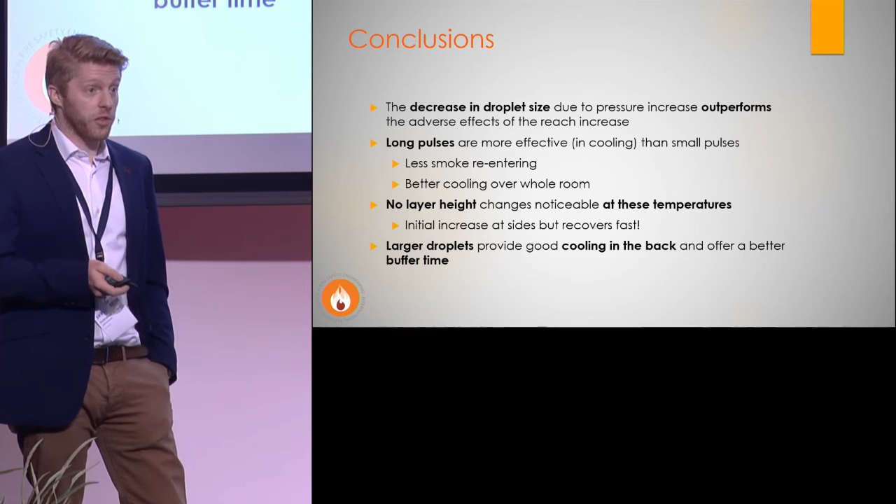We also saw that larger droplets, which wasn't shown here, provided a very good cooling at the back and often showed a bigger buffer time as well. And there was never a complete cooling below 100 degrees Celsius possible at this setup. So research is never complete.

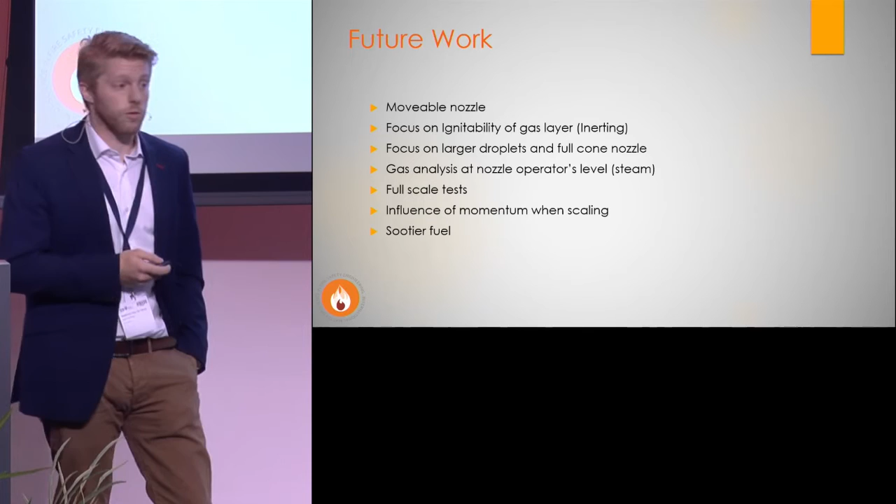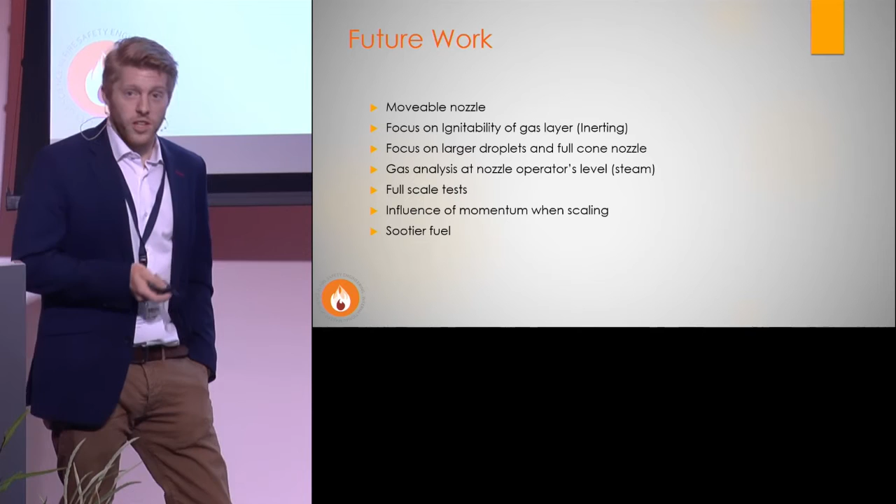There is still a lot of future work. For example, we want to work with movable nozzles, so more water gets sprayed across the whole room. I think it is also very important, as Ricardo already said, that we should focus on the inerting of the gas layer. Also, we might be able to focus on larger droplets rather than only on the small droplets. Gas analysis would also be very important at the nozzle level because we want to know if this firefighter is going to be burned by the steam. Full-scale tests, also the scaling effects, would be very interesting to study. And then lastly, we should also use a sootier fuel, so more smoke is going to be produced.